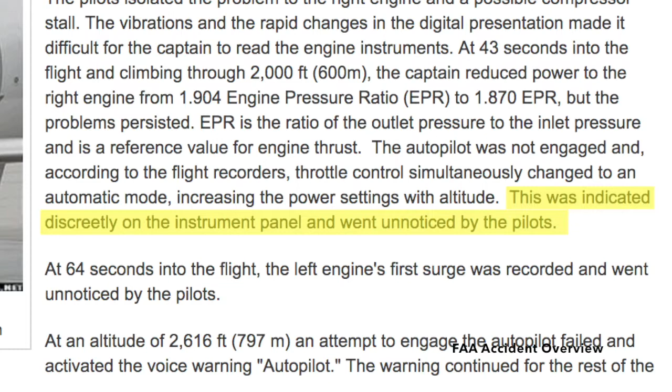For example, in Scandinavian Airlines Flight 751, the pilot directed a decrease in throttle due to unexplained engine surges. However, the automatic throttle control subsequently increased the throttle due to an increase in altitude. This was not, however, a failure in automation. The system responded exactly as it should given the situation. There was an opacity between the pilot and automation state that contributed to the incident.

In a 1990 paper on automation control, D.A. Norman states, quote, "The problem is not the presence of automation, but rather its inappropriate design. Operations under normal operating conditions are performed appropriately, but there is inadequate feedback and interaction with the humans who must control the overall conduct of the task." End quote. Our project utilizes the Flight Envelope Protection, or FEP system described in Tekles et al.

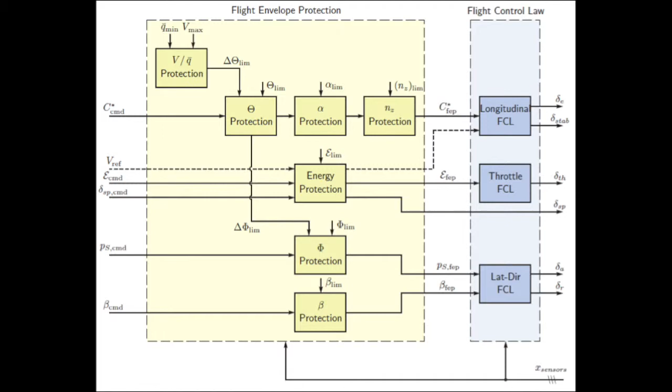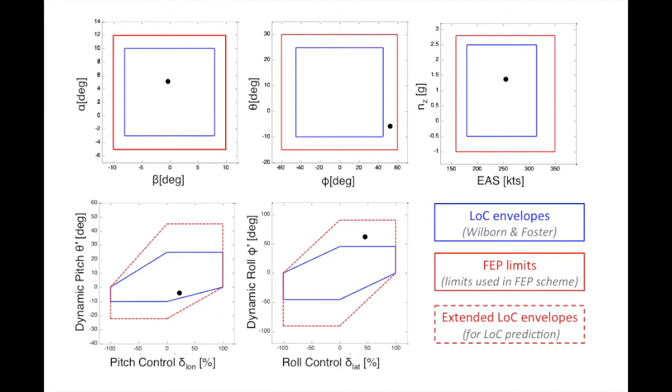And Chongvanich et al. This system relies upon the quantitative definition of loss of control proposed in Wilborn and Foster. This definition utilizes a set of 5 two-dimensional envelopes relating to flight parameters that account for aircraft flight dynamics and control use. We believe the vocabulary of limits and safety envelopes lends itself to easy integration into the pilot's model of the aircraft. We have implemented our interface at the Illinois Simulator Laboratory.

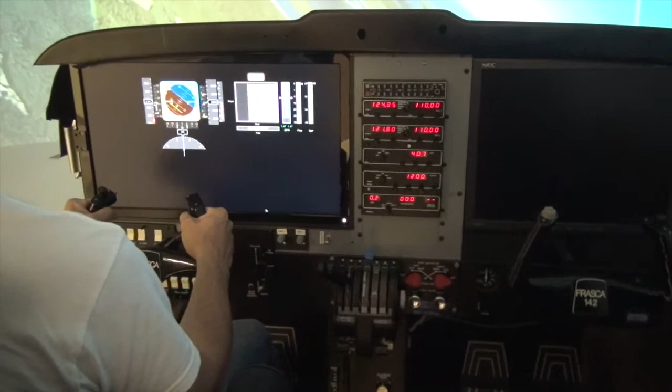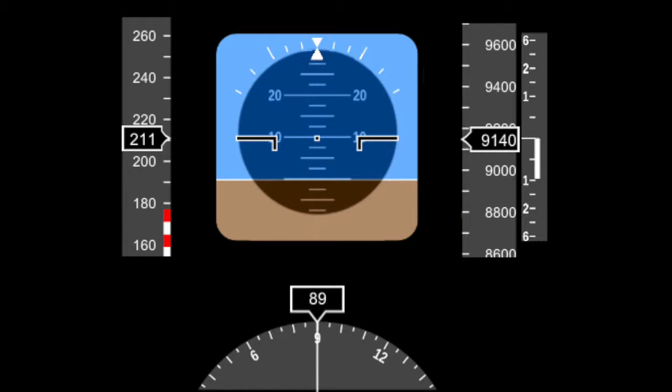The flight simulator is based on a Frasca 142 cockpit, and the projected display is driven by a cluster of PCs running X-Plane. In the cockpit, the instrument display is replaced by a digital display. For this project, the display was constructed in Unity. The conventional flight display indicates the spatial orientation and velocity of the aircraft. We supplement this with the addition of indicators showing angle of attack, side slip, and G-load.

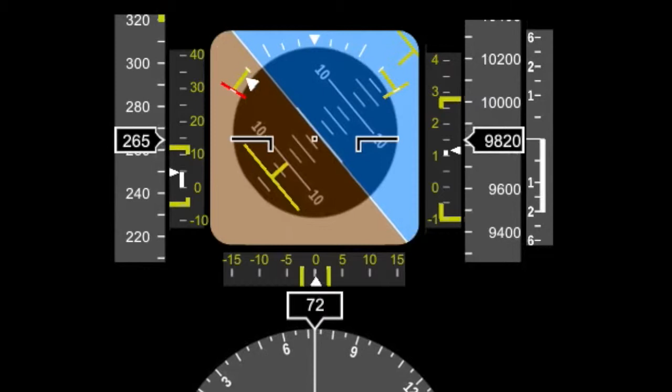All of the basic instruments, as well as our novel indicators, are augmented with markers which display FEP-derived limits. For each of these critical flight parameters, we display hard and soft limits. We see here the additional components for roll. As we increase the angle of roll, we near the soft limit. As this limit is exceeded, the perpendicular hard limit line turns red. This display indicates safe operational limits in terms of flight parameters.

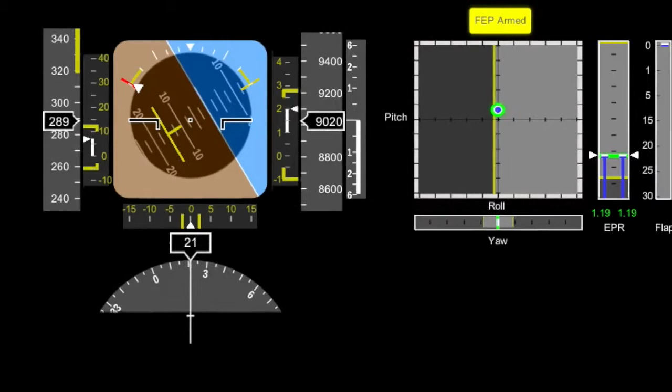Our additional interface panel, to the right of the primary display, shows FEP-derived limits as they directly relate to pilot input. For each of the control inputs, we present behavior-shaping constraints in the form of dynamic envelopes. These envelopes serve as salient visual boundaries which constrain safe use of the control column, throttle, and pedals. This display represents an indication of the available control authority and/or suggested control inputs for safe operation of the aircraft, and it accounts for both pilot's intent via input and aircraft safety through envelope presentation.

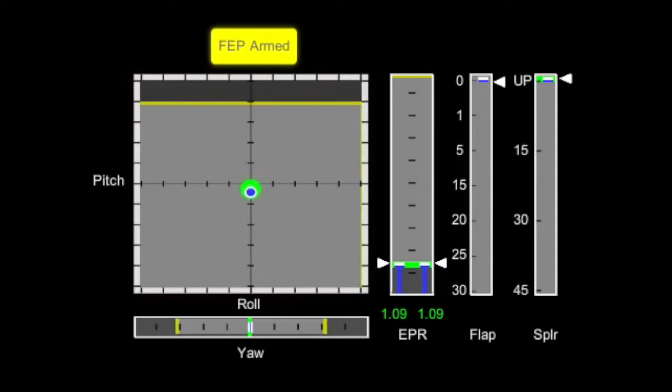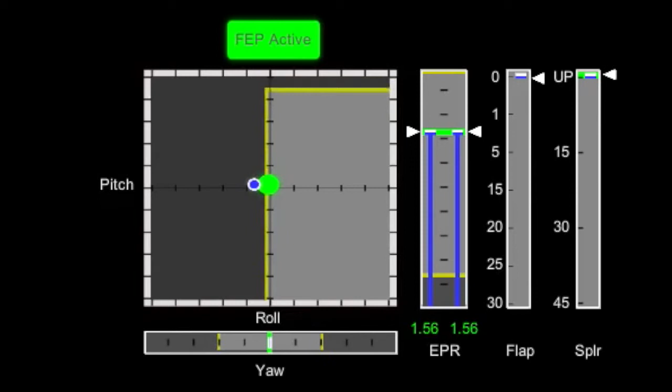We will focus on the main display box, which shows both pitch and roll. We support 2 separate modes, flight protection on and flight protection off. In both modes, the display indicates the changing boundaries of the envelope. When the system is on and armed, any excursion of an envelope activates the system, modifying pilot input to maintain aircraft control. A blue and green marker indicate pilot input and automation input, respectively. In this scenario, the green automation input is currently controlling the aircraft, while the blue indicator shows the pilot's directed input.

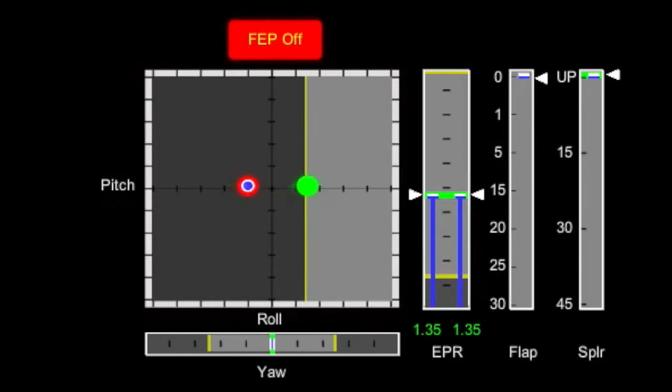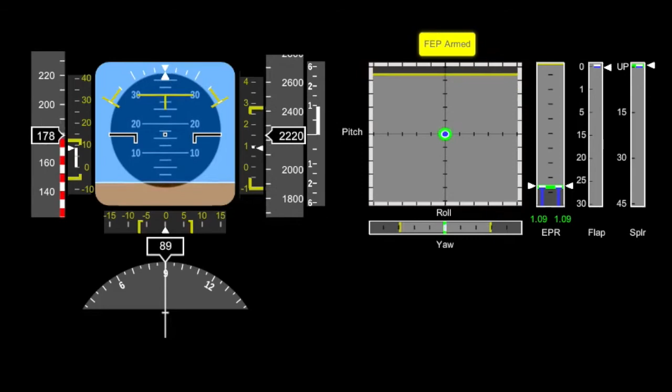We also support deactivating automation control in the FEP off mode. With no automation input, the pilot is able to steer the plane beyond envelopes of safety, but a visual annunciation alerts that loss of control may be imminent. Our system presents a more holistic understanding of aircraft state by augmenting known flight indicators with information about automation state. By increasing pilot situational awareness, we hope to allow them to more fully utilize their expert knowledge and improve overall performance.